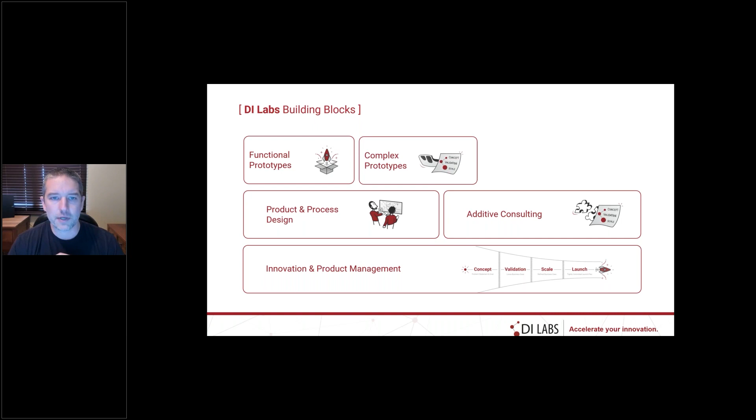In addition to that, we've got these things we call complex prototypes. We've got one in the presentation today, and it's something that can't be produced as a single part, or it's extremely complicated. We've got something neat to share today.

And then finally, we use those capabilities to run full production. We've got a couple of examples that we'll share today where we'll produce parts in the tens of thousands on our additive equipment, using our equipment in place of traditional manufacturing like injection molding, for example. So those are the building blocks for our business.

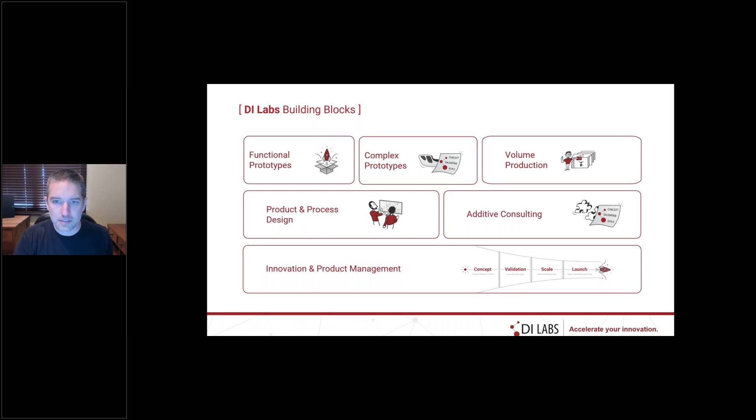I'll share a little bit about our history. Brian and I founded our company in 2013. We're geeks, we're gearheads, so we founded our company as a product development firm. The very first thing that we tackled was the redesign of print heads for fused filament fabrication machines.

One of the challenges that we faced was we needed to be able to do prototyping to serve our customers' needs, but we needed to do it significantly faster than the technology on the marketplace would allow us to. So we essentially developed a printhead system that was 2 to 4 times faster than anything else on the market. We did that for ourselves, for our in-house needs, and we found that the market also needed that technology.

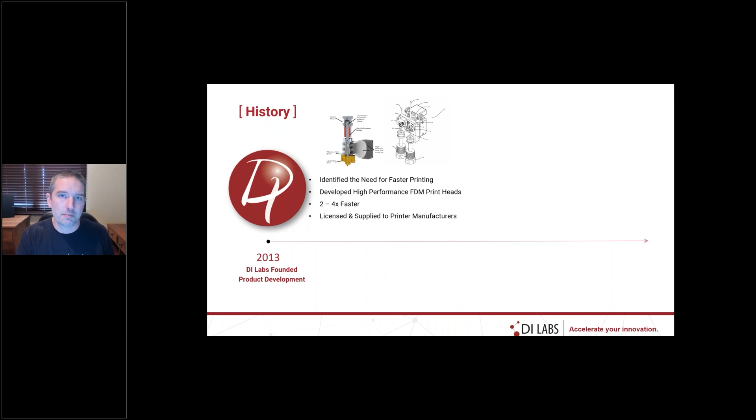So we ultimately licensed and supplied that hardware technology to printer manufacturers. I think that's pretty important for us to share, simply because we've been deep into the thick of it, and we recognize the need for speed—the need to get to market faster and capture the opportunities before your competitors do. Along with the development of that technology, we've also been developing products over the last several years.

And up until 2017, we were using the FDM technology that we had developed along with SLA to provide prototypes to our customers. We also did some outsourcing to other service bureaus, but what we realized was that either the quality wasn't there or the speed for us wasn't there.

So in 2017, we made our first major expansion with additive manufacturing, and we purchased an HP multi-jet fusion machine. We are proud to say that we were the first in the state of Minnesota to have this machine, and it was necessary for us to be able to provide quicker response time to our customers, as well as greater volume capacity. So we purchased that at the end of 2017.

And then about a year later, we doubled our capacity and brought on another 4,200. And since then, we've continued to expand our technologies and our technology portfolio to serve our customers' needs. Essentially the way it works is our customers will bring us a project. If we don't have the capabilities to serve the need for that project, then we'll make the investment in the technology to be able to do that.

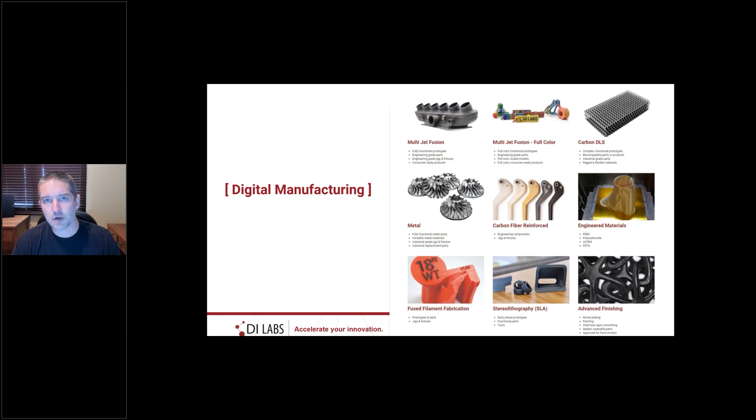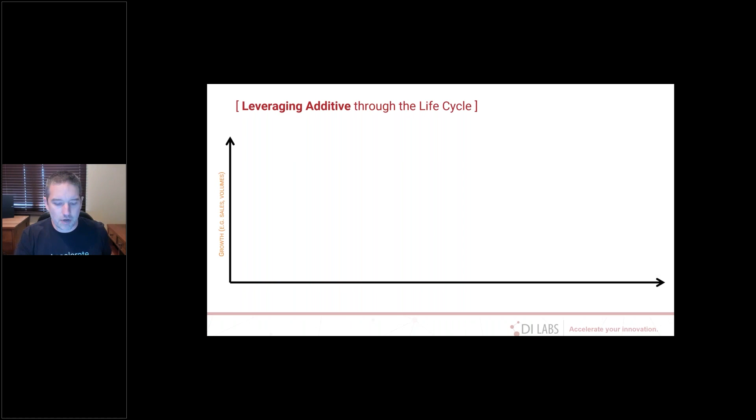So what does that mean, competitive advantage, and how do we use additive to provide that? The way that we think about it is in terms of the product life cycle. And I know that most of the folks on the webinar have been familiar with this type of graph. We added the development stage to this life cycle chart.

Essentially, we've got the development stage, introduction, where the product gets introduced to the market and you start to build sales growth. And then you've got sales growth ramp up, which leads into a mature product line. And then ultimately at some point, that product line will mature and it'll end up declining in terms of demand from the marketplace. Well, we use additive manufacturing in each of these stages today.

In terms of development, I think we're all familiar with using prototypes for development activities. It's been common for decades. We're also using additive manufacturing for the initial production. So thinking about in terms of offsetting risk and getting to the market sooner, we'll share some examples where we use our additive manufacturing equipment to bring on products to the market, get customer insights earlier and more often, so that we can sense what failures may exist before we go all in.

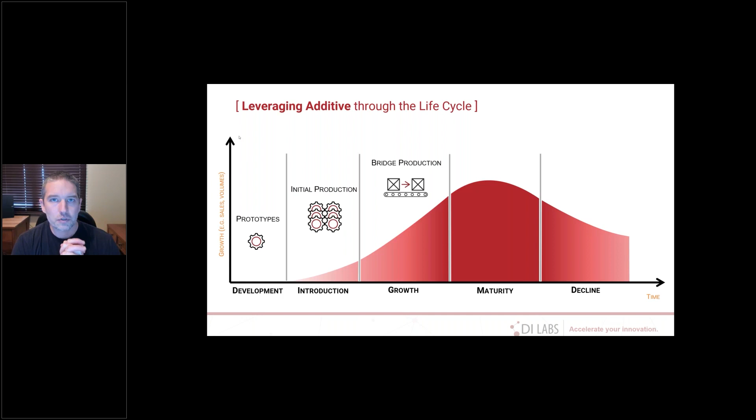Going through the growth phase, we'll use additive manufacturing in terms of a bridge solution. So where we start to get to that volume demand where additive manufacturing may not have the capacity, we'll use additive to get us to the place where we can use injection molding. So we'll consider that as a bridge production tool.

And then in the mature stages, we'll use additive in terms of jigs and fixtures. So it's really to help aid in the production of products using traditional technologies like injection molding or subtractive manufacturing.

And then finally, in the decline stage, we're using additive for on-demand repair supply. Rather than having extensive inventories of parts for products that are obsolete or out of date, we're using additive to basically serve as an on-demand supply chain. As parts break, we're able to respond quickly with production, which saves extensively in terms of cost of inventory.

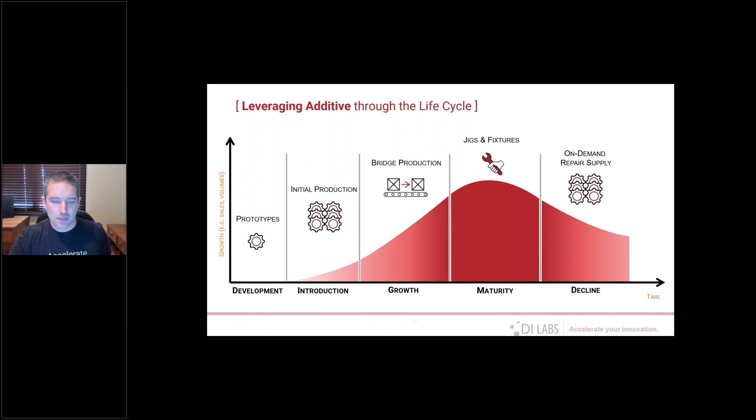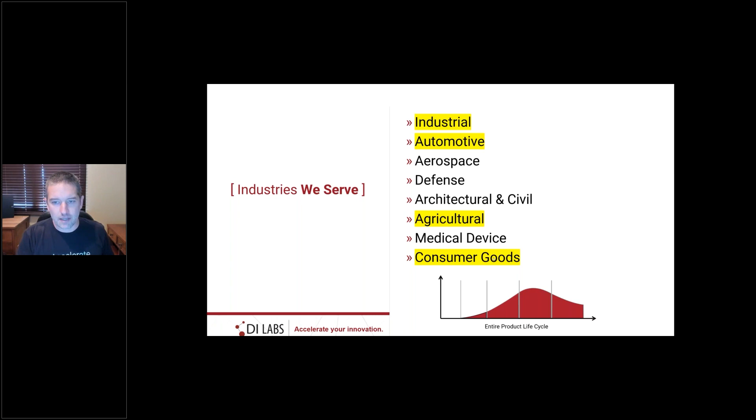Each of the examples we have today can be applied to all the segments shown on the screen, but primarily focused on these highlighted sessions. All of the examples will at one point or another encompass the entire product lifecycle from cradle to grave, and as we go through each product example, we'll highlight where they serve the life cycle.

So we're sharing case studies in a 2-step approach. First, I'll share the case study itself and showcase how we applied additive manufacturing to solve a problem. I'll share what the results were, and where in the life cycle that solution took place. Then we'll go behind the scenes and share how the product or solution was made, basically how we did what we did. We'll share some tricks, secrets, packing configurations, and special considerations we had to take in order to solve the problem.

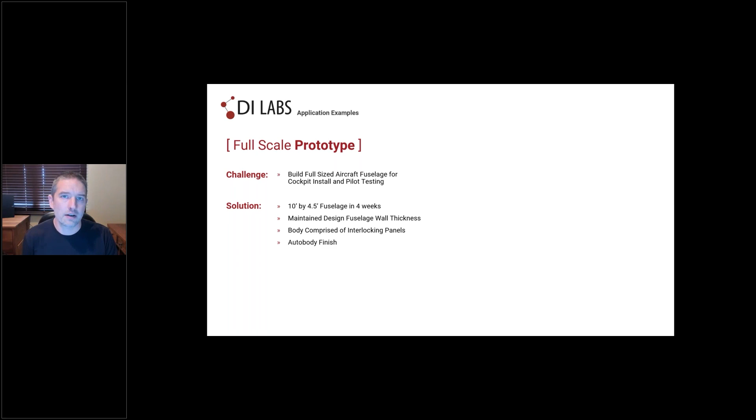The stage of the life cycle we supported with this project was the tail end of the development stage to validate the design. It's then been used to ramp up sales and provide visuals for potential customers, to allow them to see the aircraft before the mold and finished product was on the showroom floor. This is a great example of using a full-size prototype to basically develop pre-sales with potential customers.

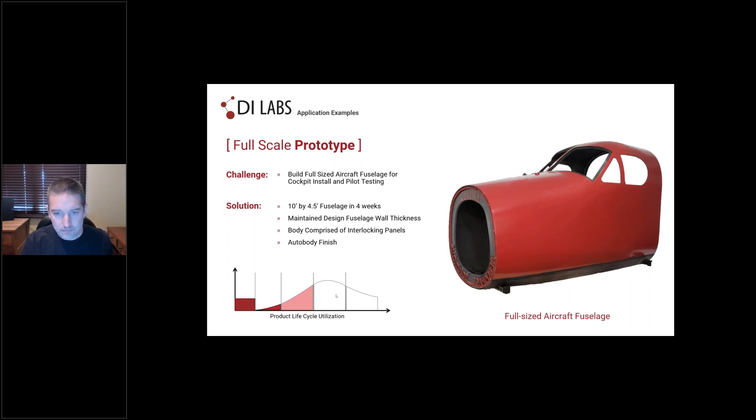So then the question is, how did we do it? That particular model was comprised of over 130 panels. That's pretty tricky because the panels are thin, and they all have to lock together - you can imagine it's like a three-dimensional jigsaw puzzle. So we had to design the panels to minimize or eliminate warping and dimensional change.

We designed the pack to optimize thermal management so we could produce the body panels fast and in volume without having distortion, and finally to be able to maintain the outer surface of the skin. This floating image on the screen shows one of the packs we had for the panels - there's maybe 10 or so panels in this pack, plus some other parts in this file that we ran along with this particular project.

The entire fuselage was produced with a nylon PA12. So this virtual pack here shows what would come out of the HP multi-jet fusion, and it would have come out in nylon 12.

Print time for a pack like this would have been probably about 14 to 16 hours. And because these panels are so thin, we cooled them over an extended period of time, something like 30 to 40 hours. So you can imagine, as we were producing this fuselage body, we had 130 some odd panels, 10 to 13 panels per build. It took us about 10 builds to produce. So that gives a snapshot of what that looked like from a process flow standpoint.

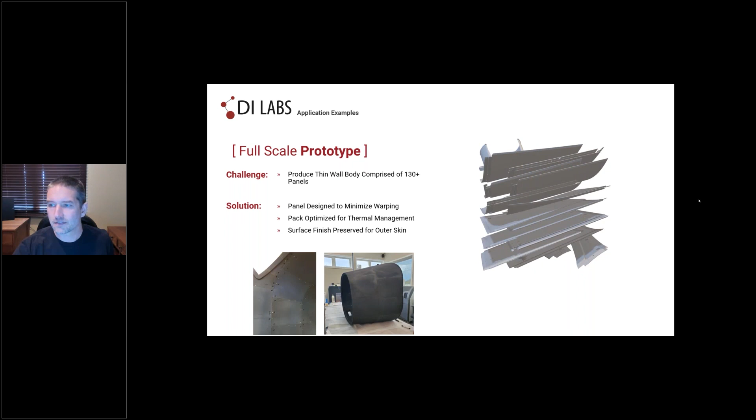Alright, so we'll move on to the next case study. We'll change gears here quite literally. This was a manufacturing process adapter that was used for a customer that had developed a new product. It was a plastic tubing product, and they were challenged because the new product was different enough from their current tubing that the downstream processing equipment they had wasn't compatible with the new product. So they brought us the challenge of adapting the existing equipment to the new product, and do so in a very short period of time.

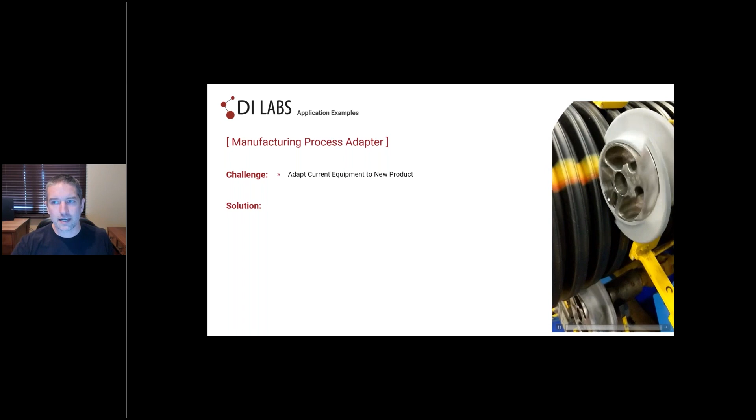As you can imagine, the product was being produced. They had this secondary process where they needed to modify that product and they needed to be able to get it out to customers, so time was of the essence. They brought us this challenge, and what we did was we essentially 3D printed adapter sleeves out of nylon PA12 and had them fit over an existing aluminum machined hub, essentially. So we adapted the existing technology for the new products.

By doing that, we saved about a six-figure capital expenditure, because they didn't need to make the new aluminum hubs. And on top of the expense savings, there was a time savings of over 12 weeks. The reason for that was the aluminum hubs took something like 12 to 16 weeks to machine, and that would have prevented the new product from going to market in its final form. So in about a week and a half's time, we were able to reverse engineer the hubs and then 3D print these nylon sleeves to fit over them.

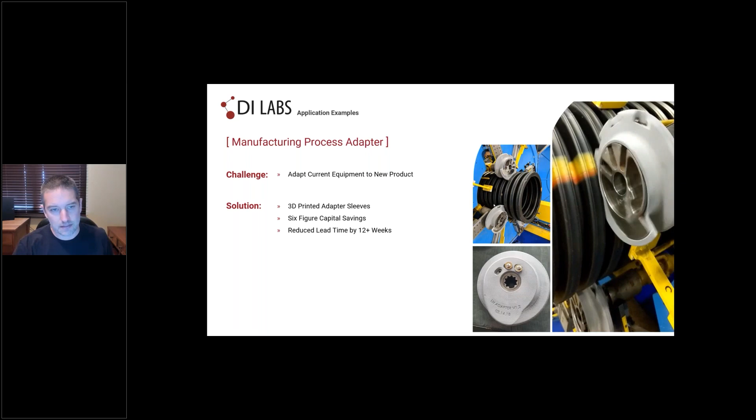This project satisfied nearly all stages of the product life cycle for this customer, from introduction to growth, and it has the ability to serve through the entire lifetime of the product in terms of manufacturing. In this case, the nylon sleeves may ultimately be phased out in lieu of aluminum hubs, but they do have the performance and strength to last the lifetime of the new product.

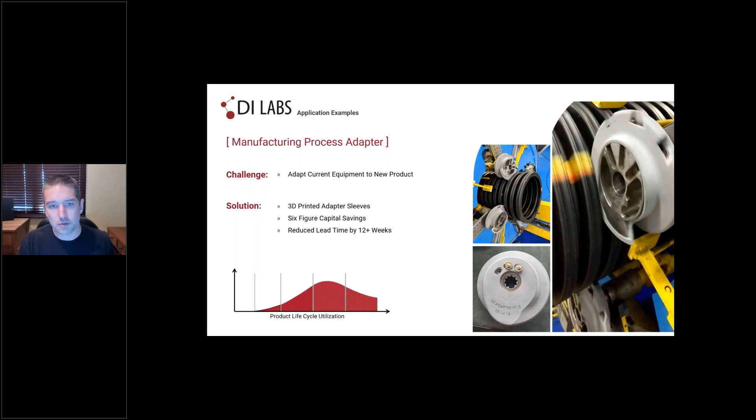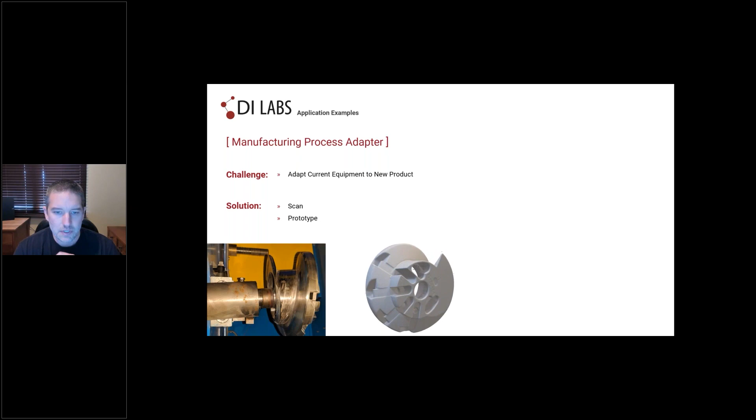Looking at this from a process and manufacturing standpoint for 3D printing, the process workflow for us was to scan the existing aluminum hubs. After that scan, we produced a prototype so that we could have something to fit the new sleeves to. And then we transitioned into production.

This rotating image here on the right shows 6 or 8 different sleeves that are in a virtual build. So for every one of the HP runs, we would have had about 8 sleeves that came out of a production. And this is how the parts would have been packed in the build.

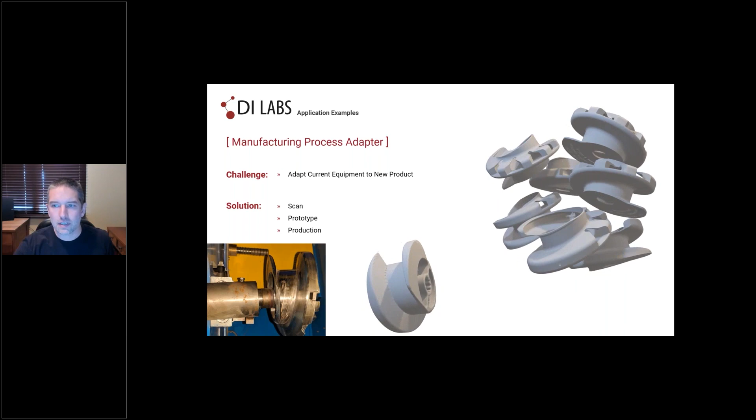I just want to make sure I'm getting the questions here.

We've got a question: how durable is this printed sleeve, and can it be used long-term on a production line? That's a really good question. We found that these sleeves, after they were operated for well over a year, showed a little bit of wear, but it was only in discoloration, not in thickness. So this particular solution is still in place today, and it's still serving this application. We found the sleeves to be quite robust, and because they're being complemented with the aluminum hubs, there is really little extreme force being placed on the sleeves. So it turns out to be a great solution where you can combine subtractive manufacturing along with additive to solve challenging problems, and do so much faster and at a much lower cost than using just traditional subtractive manufacturing.

All right, so we're going to transition now. We're going to change gears again.

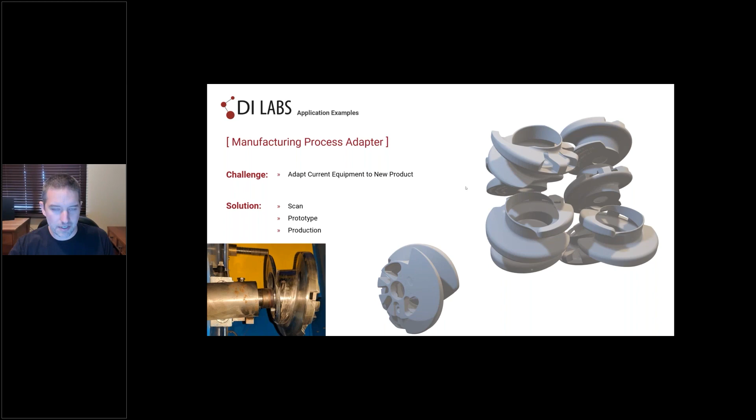Into an example of a project where there was a new market introduction. We had a customer come to us who wanted to launch a new watertight threaded valve body. It was part of a new piece of equipment, and they weren't sure how big the market would be for this particular valve body, so they were hesitant to invest in injection molding. They needed to assess the market, but that would require more than just 1 or 2 parts. So they asked us if we could help finalize the design for additive manufacturing and produce these parts in low volume. The kicker was, of course, they needed them fast.

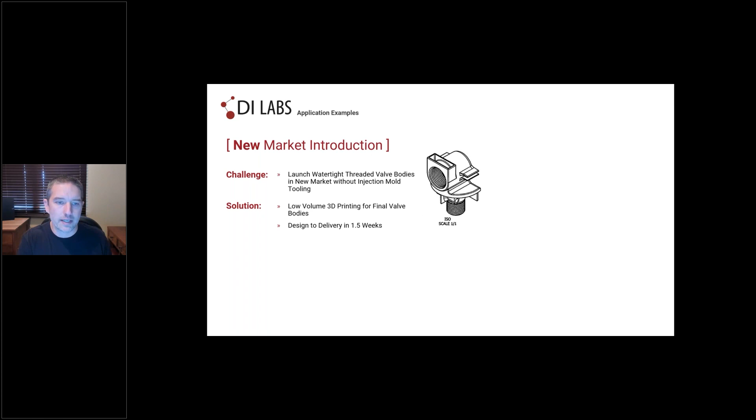They were at the place where they had the design nearly finalized, and the product this valve body would be attached to was going to market. So time was of the essence. We ended up taking this design, modifying it, and delivering it in about a week and a half, using it to satisfy the introduction and growth phase of their product life cycle.

The images here show the valve bodies, which we produced in nylon, the PA12, and they did have the threads built in. That was a requirement for the customer, that the threads would be built in just as they would be with the injection molded parts, and the threads needed to be watertight. This is something we tested and validated before going into production.

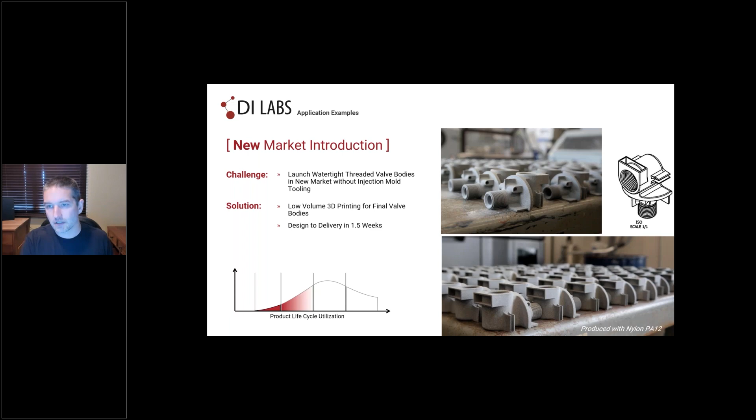So looking at this from a behind the scenes standpoint, how did we get away with producing these and having them be functional? It was really important to have threads that were functional and high performing. So we did testing before going into full production to make sure we could consistently produce those threads and have the dimensional accuracy necessary for water tightness.

Anytime we go through a project transitioning from a prototype stage to full production, it's critical for us to assess the build pack layout and make sure it doesn't have a negative impact on the print accuracy and consistency of parts from one part to the next.

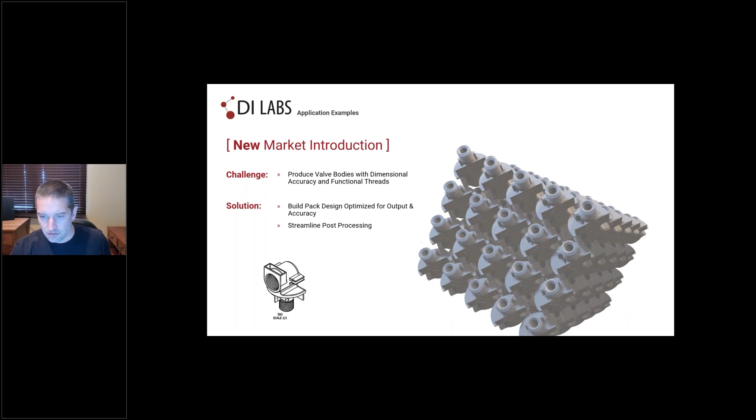We've got a question asking, were these parts designed for air or water, and does it seal? These parts were designed for water. They did seal. We had done some testing in-house. Most of the parts we did not chase the threads on—the threads came out of the machine, parts went through post-processing, and they were functional from that point on with the fittings the customer had as part of their injection molded assemblies.

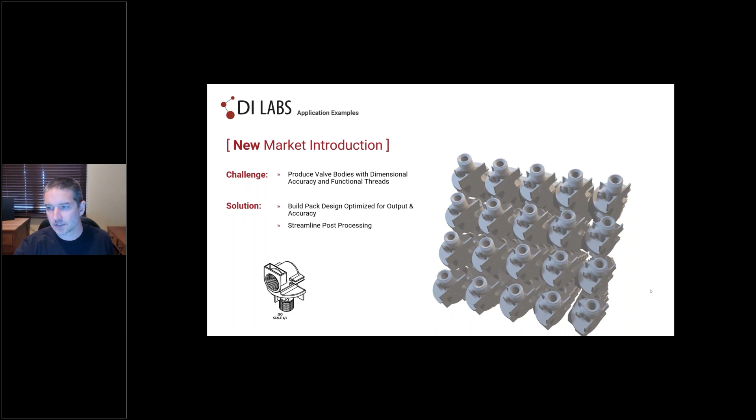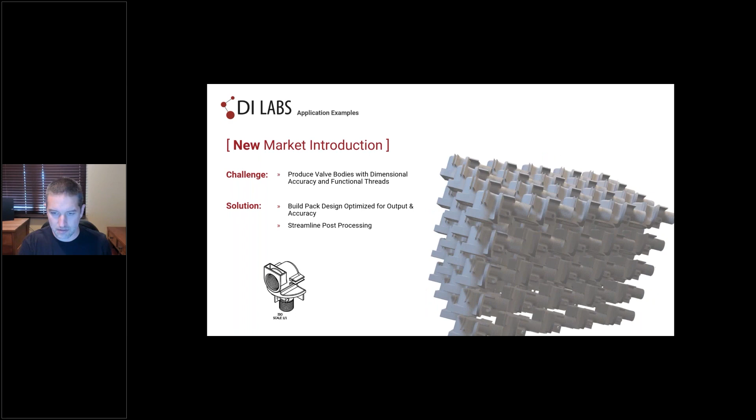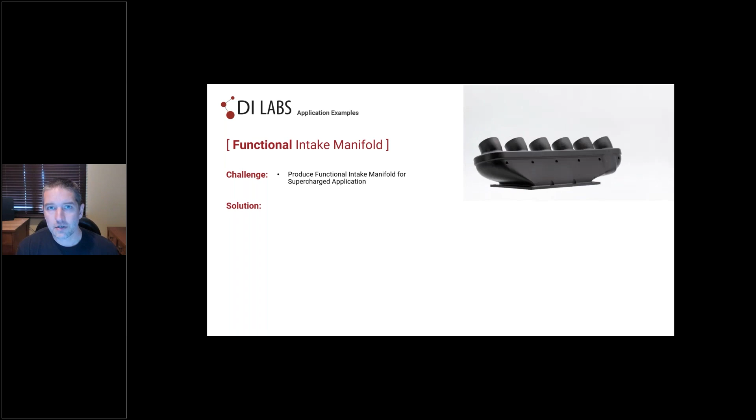Okay, switching gears yet again. This was an interesting project. This was a customer developing a high performance automotive solution. They were essentially applying a supercharger to an existing inline 6 motor that wasn't designed to be supercharged. They weren't quite sure what the market size would be for their system, and they needed to dyno tune their setup. So rather than going into a cast aluminum manifold, they came to us.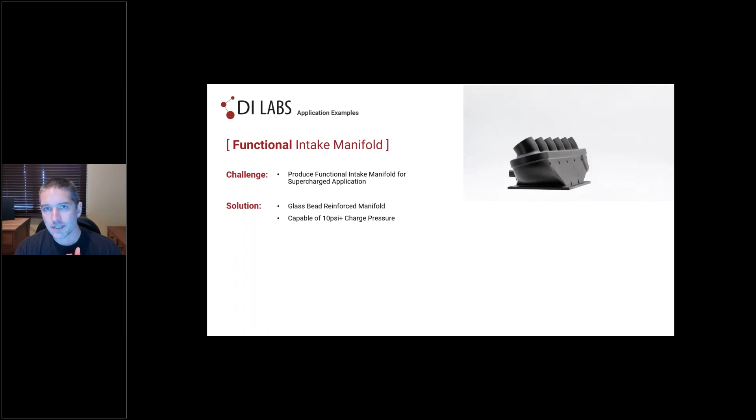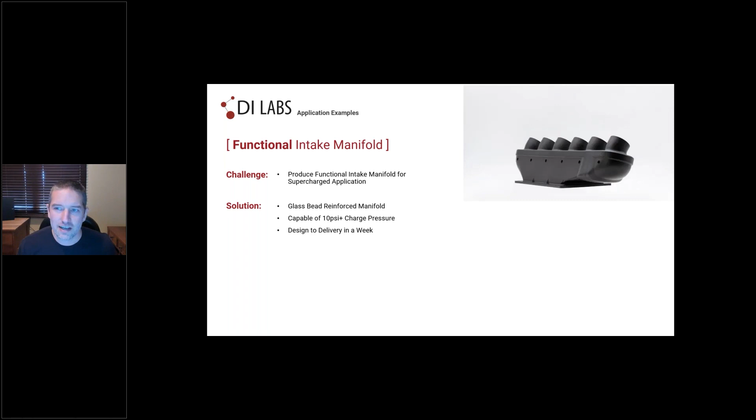We worked with them to essentially print their intake manifold. We printed it with glass bead reinforced nylon, and we worked with them to ensure the design was capable of withstanding over 10 psi of pressure for the temperatures it would be operating under. And again, the kicker, there's always a kicker—in this case, they needed to get the manifold on the car ASAP, basically as soon as possible. We were able to reconfigure this manifold for additive and deliver it to them within about a week.

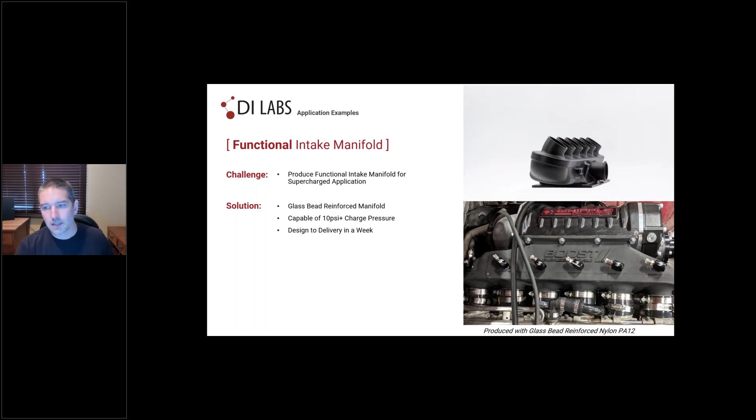So this bottom image shows a close-up view of the manifold installed on their setup and their engine.

It's kind of interesting because there's a couple of 3D printed parts on here. You can see that the manifold is black, it's got the fittings in it, and the supercharger that's mounted on it. On the back end of the supercharger, there's another elbow that's also printed out of nylon. So there were several parts of this system that were all printed out of the nylon.

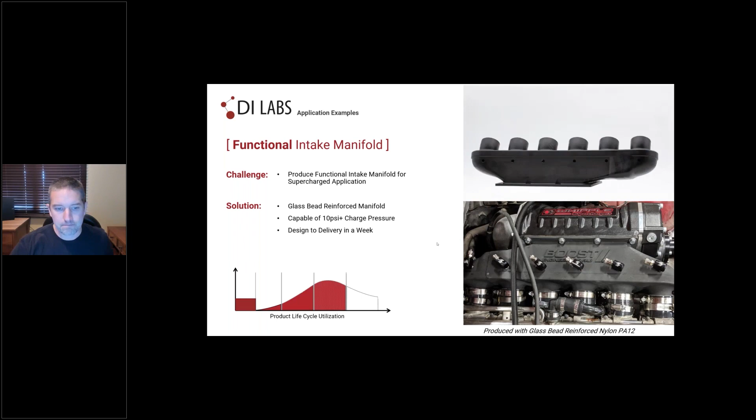This is an interesting project that is still ongoing. We used Additive to support them in the final phase of the development, along with the introduction and growth. We're working with them to understand whether or not this is feasible from an economic standpoint for full production. Depending on the volumes that they're producing, this may very well be a viable resource.

For those that have looked under their hood in the last 5 to 7 years or so, I'm sure you've seen that there's a whole lot more plastic parts that are used for critical components of the engine, essentially on the intake side. So the materials that we're running for this manifold are not unlike what's being used by a lot of the OEM manufacturers for their underhood systems.

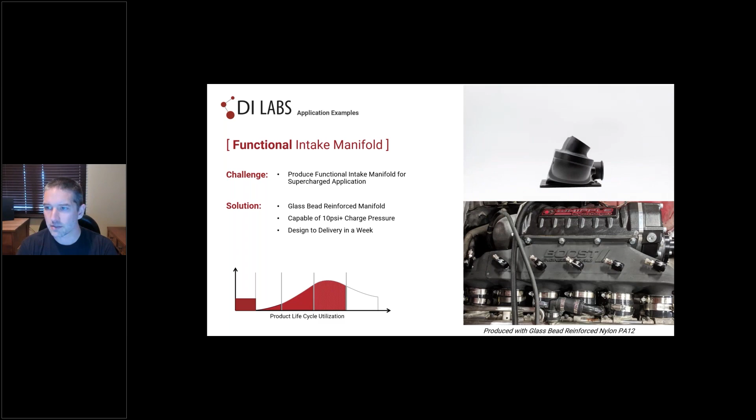So I just got a question. This is a good one. I'm glad you asked it. So the question is, are we able to thread plastic? And you'll see here...

Go back one slide. You'll see here on this image that there's a couple of brass fittings on the underside portion of this manifold. We had a couple of different options for the hardware connection. Either we could have threaded in the hardware, or we could have used brass inserts. In this case, we decided the brass inserts would be a better solution. So these two areas underneath the manifold are essentially brass inserts, which are used for the support structure for the manifold and supercharger. In a situation like this, the inserts are a much better solution than either printing the threads in the part or tapping them after the fact. This turns out to be a great solution where we essentially heat stake the brass inserts right into the manifold.

Hey Carl, I have a question that just came in as well. It's from Sam, and he's asking about the surface finish. Is it easy to control the surface finish on a plastic part?

Yeah, that's a great question. Sam, you may have picked up on the difference in the image on the top of the screen to the image that's on the bottom. The image that's on the bottom is a part that came out of our machine, and we essentially mechanically smoothed it. That's a form of tumbling. We did that because we wanted to be able to have the smoothest finish possible.

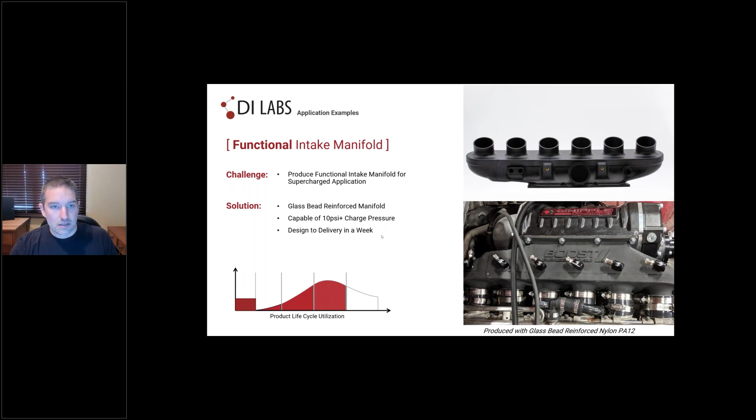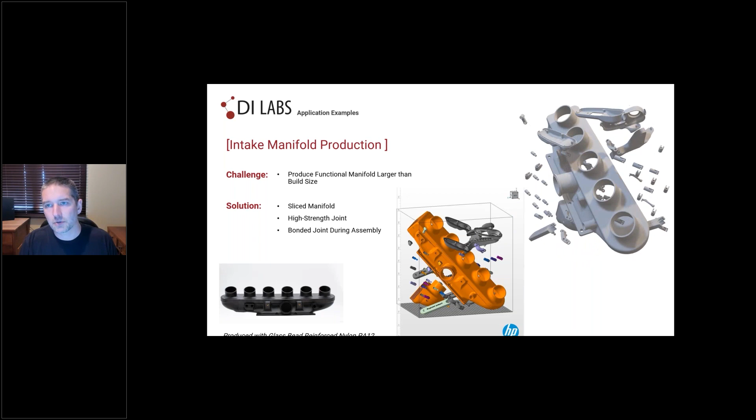And in this case, we did use an adhesive to connect the parts together. It was a two-fold connection, so the joint was designed so that it became positively engaged when assembled. And then in addition to that, we had pockets where we put in adhesive to ensure that the joint would remain permanently affixed. All right.

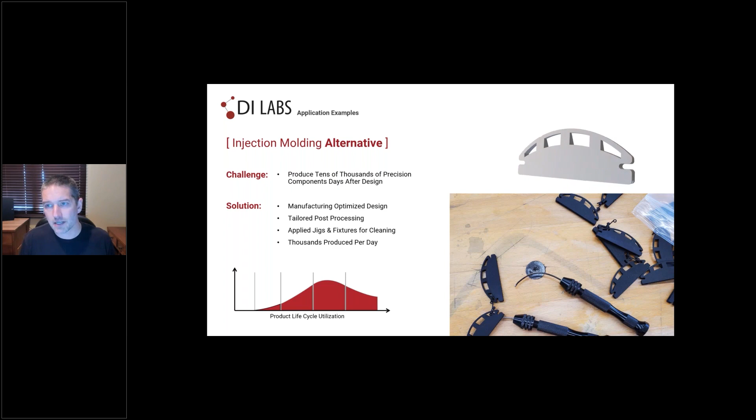For this particular customer, they had considered injection molding the parts. The challenge for them is that they had some unique features in terms of a channel that went through the part, and it was too challenging to injection mold. On top of it, they needed parts at the 11th hour - they needed to get parts out as quickly as possible so they didn't slow down their production operation. So this was a perfect example of where additive was able to deliver quickly and in the volume they needed of tens of thousands of parts within a short period of time.

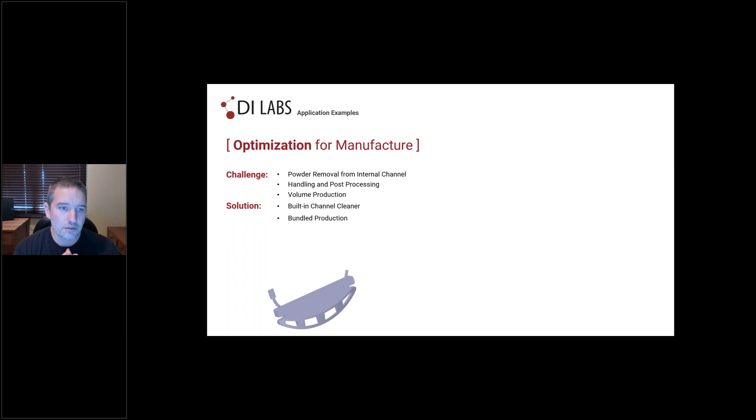Looking at this from a manufacturing standpoint, we did have some challenges. The biggest was the powder removal from the internal channel and the handling during post-processing, especially with such a great deal of volume. So it's kind of neat - we built in a channel cleaner, so you could picture this as like a built-in pipe cleaner that was designed right into the part and produced as part of the production. The other thing we did to help improve handling is we printed these in batches of 5, so when you pulled a batch out, you knew you had 5 parts, and it was easier to manage removal of the built-in pipe cleaner, as well as the post-processing and cleaning of the channels.

So this image that's rotating shows what part of the pack would have looked like. This was just one layer, and it shows just a small layer of what was produced within one of our machines.

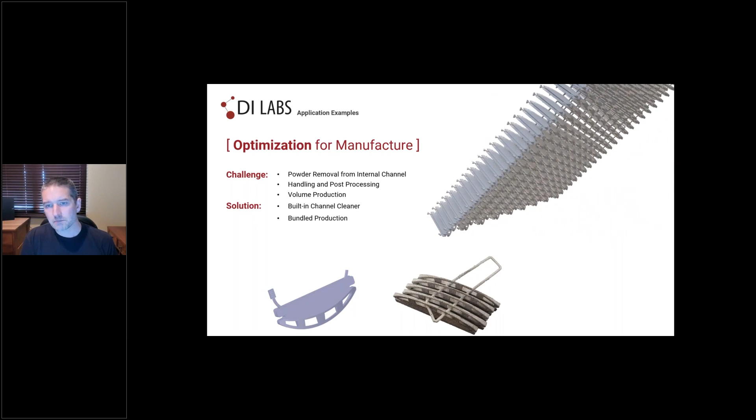Easier is an interesting question. There really isn't one that's necessarily harder than another. Because of the build volume of the machine - think about it like a foot cubed, a little bit larger than that, but think about a foot cubed - the larger the parts become in that build volume, the more costly they become. So we found that from a production standpoint, smaller parts tend to be - we're able to run them at higher volumes and be economically competitive. As the parts get larger, that can be a little bit more challenging from a cost structure standpoint. But it's really not harder or easier from a manufacturing standpoint.

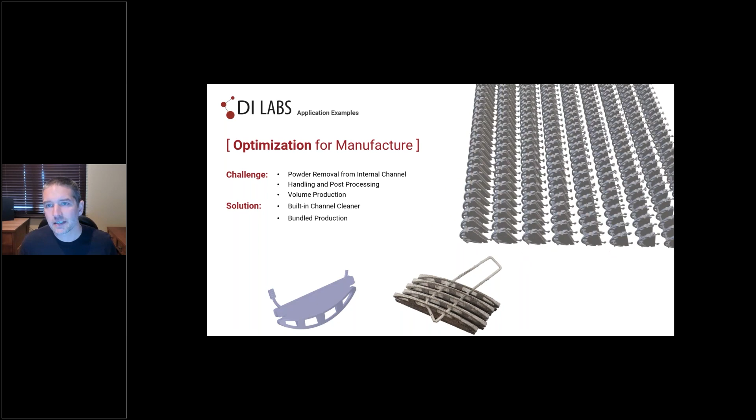So another great question: do you have any additive materials that can be used directly in the human body for medical applications? The short answer is yes. The long answer is that's a really nuanced and very specific area. I'd be definitely interested in talking more about that with you, Rob. The short answer is yes, we'd like to talk about that.

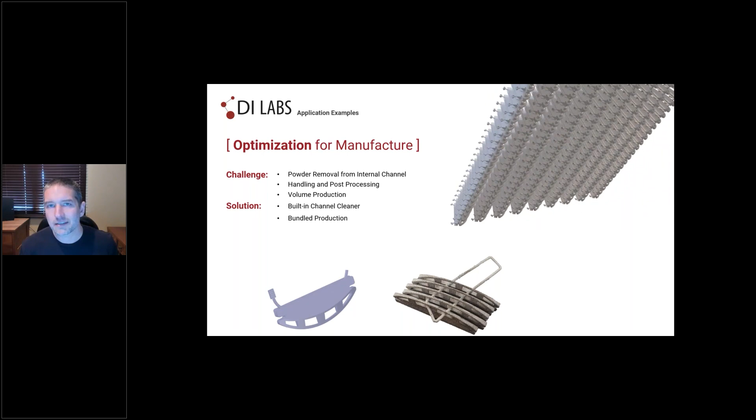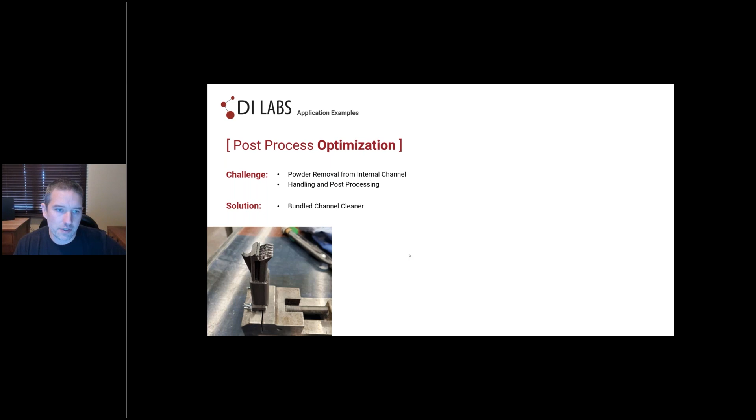We're going to stay on the same project on this slide. This was kind of an interesting process for us. So as we continue to produce those small parts, we found ourselves optimizing the process, and I wanted to share this with you all today. This little part here on the screen is a jig and fixture that we designed to clean the channels of those parts. This was printed on the Markforged, so it's a reinforced nylon 6, and it's an assembly that has some action to it. So I'll play a short video here.

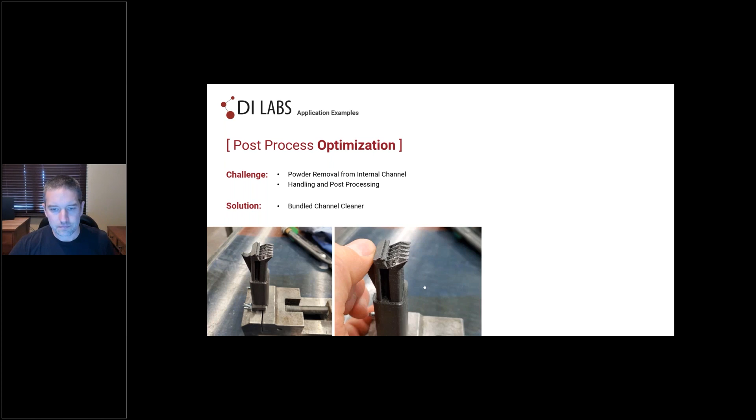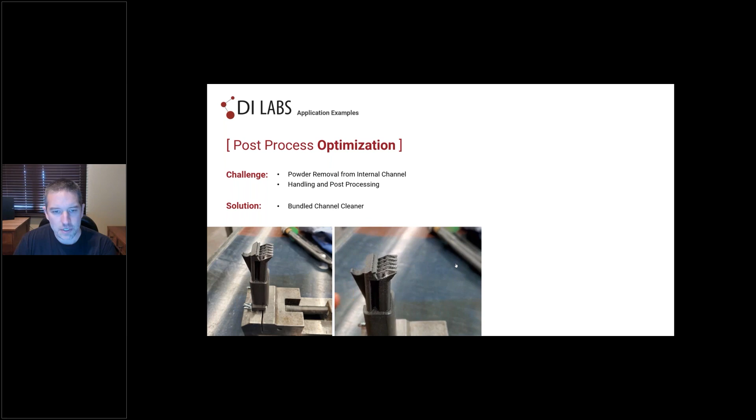So we designed that system so it had nested pipe cleaners in it, and when you press down the trigger, it would essentially insert those pipe cleaners into the channels of the part. I've got another video here that shows that system actually cleaning out a bunch of parts.

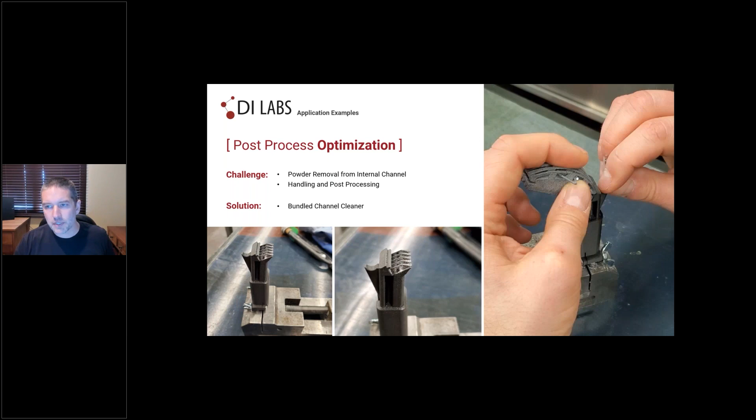This was a prototype fixture that we developed. There was a production version that was a little bit different than this design, but they were all 3D printed. It just goes to show how you can leverage additive manufacturing to be extremely responsive, to help either streamline a process when you get into production or reduce time. We found this to be extraordinarily valuable for that leg of the project, as we got to the 25% mark. This was something that we implemented.

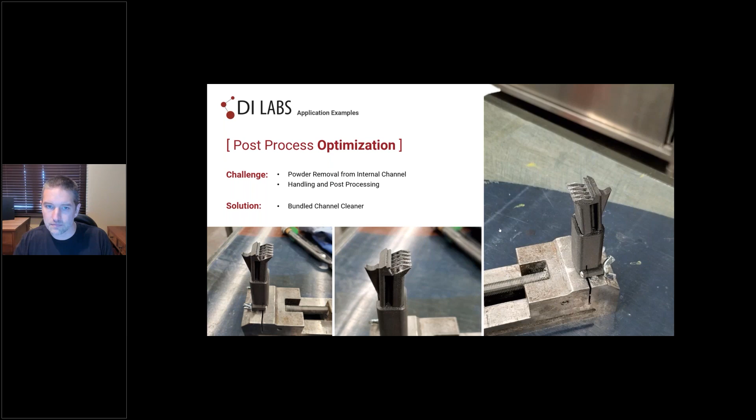And yes, we did hire a Seinfeld hand model for that, in case those were wondering. Beautiful hands, beautiful hands. I was just going to ask you that question, Carl.

Okay, moving along. This is another project that was pretty interesting. This was an aeroponics optimization and production project. A customer came to us that was doing aeroponics growth of produce, and they wanted to be able to go full organic. The baskets they were using for their lettuce didn't permit them to do that.

So we worked with them to develop baskets similar to what's shown on the screen here. We worked through a series of about 10 iterations involving about 16,000 baskets that we produced, to make sure we were able to manage the growth cycles, deliver the organic requirements our customer required, as well as optimizing the growth cycles. Through those efforts, we were able to provide over a 30% increase in produce yields, along with a reduction in growth time.

This is really remarkable. I realize there may not be a whole lot of agricultural folks on the call, but we did 10 design iterations of 16,000 baskets, and we did that over a period of 90 days or so. We were able to basically test at scale, and that was remarkable for us in order to optimize the product design and optimize the results.

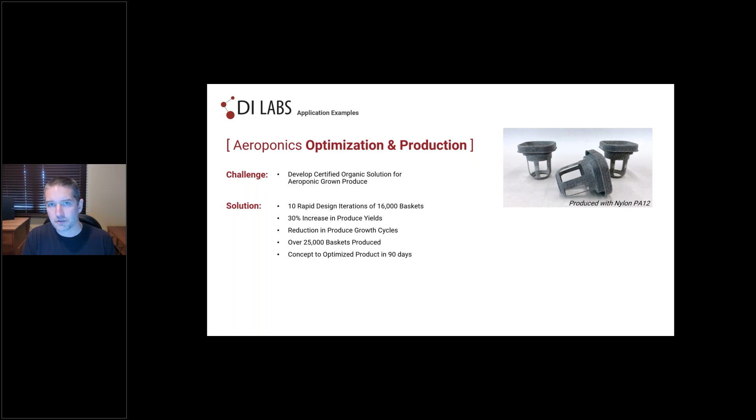We found results that we would have never expected. Had we been injection molding these parts on the second, third, or even fifth iteration, I don't think we would have been able to uncover the type of headroom we found in terms of positive results. So to date, we've done something like 25 or 30,000 baskets in production.

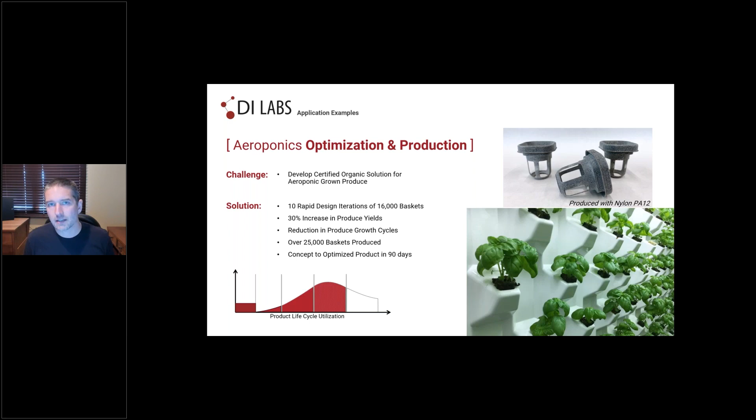Something that was a much higher profit for him. So we uncovered a whole new market opportunity that we would have never been able to uncover had we not leveraged additive manufacturing.

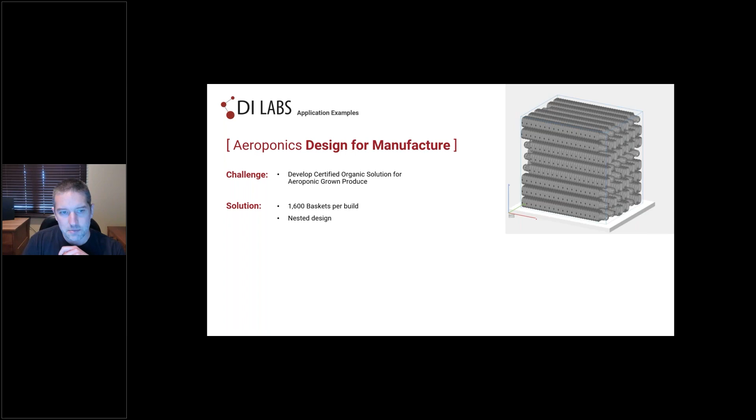From a production standpoint, we produced about 1,600 baskets per build. They were nested like solo cups. This shows a row of the baskets nested, and this is kind of a neat photo that shows the baskets in the print process, probably halfway through one of those rows as the parts were being printed. This was done in the multi-jet fusion machine using nylon 12.

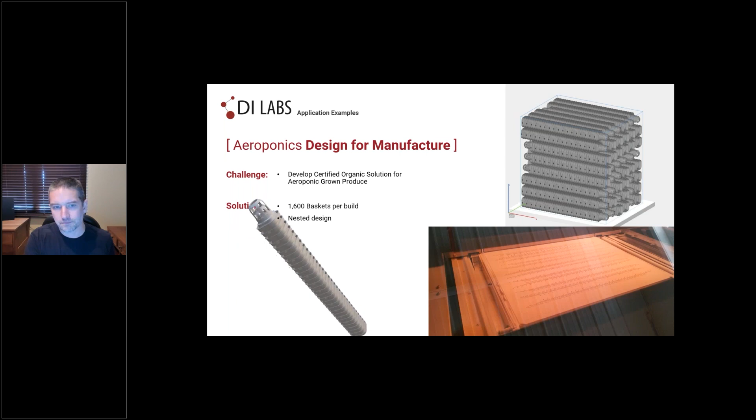As we were going through our post-processing exercise, we uncovered opportunities to build handling fixtures basically into the parts, so that when you pull a row or stack of parts out, they have built-in carrying fixtures to help simplify the post-processing.

Hey Carl, I have a question here from Paul asking about the time it takes to clean the parts. Is this time-consuming? It can be.

Every project is a little bit different. These are pretty extenuating circumstances because there are so many parts and they're caked with so much powder. When we take a project like this on in a production type phase, we'll actually develop the downstream process to semi-automate the cleaning of the parts. If you were to try and manage these parts with just a standard hand style bead blaster, it would take an extraordinary amount of time—longer to post-process than to print. So in these situations we develop the process to streamline that. We've gotten these types of projects down where the post-processing isn't that painful, but it can be if you don't have the infrastructure in place.

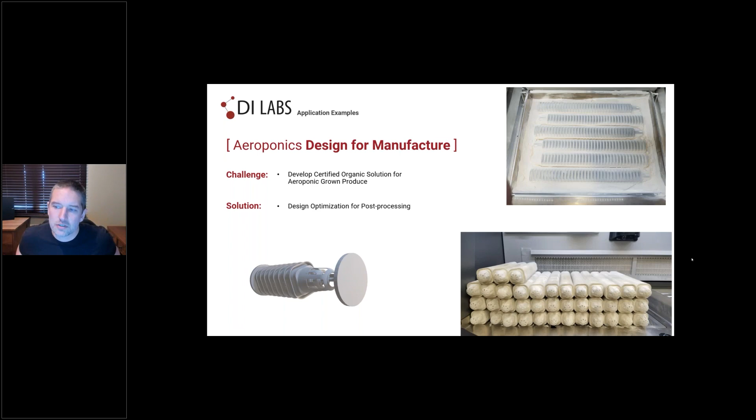A question just came in: are we helping with COVID? We are helping with COVID. Everybody on the call has probably been in tune with the news—additive manufacturing is a perfect technology to respond quickly to things like this. We've been developing tailored solutions, whether masks or shields, for particular industries and customers. We're able to go from design to production overnight. So the short answer is yes, and it's neat to see additive manufacturing coming to the call of duty.

Hey Carl, I have a question from Cameron about your post-processing capabilities—could they send jobs to you to control surface finish? Is that something you have capabilities to do in-house? Yes, we are. We will typically post-process parts that we produce. Sometimes we've got customers with great relationships who have their own equipment, and they'll send us parts to help them from a plating, finishing, or painting standpoint. So we do help some of our customers with that.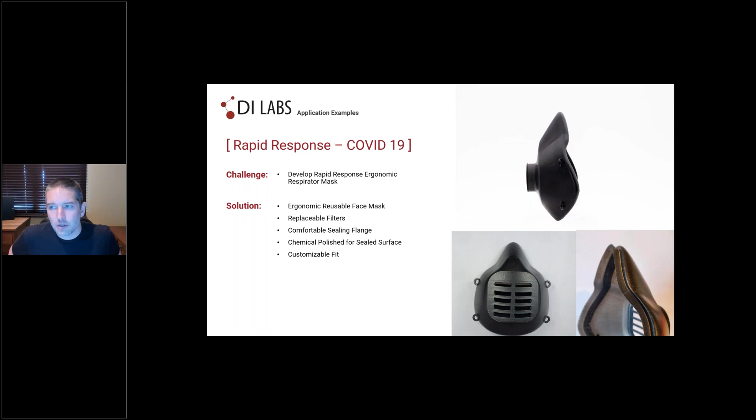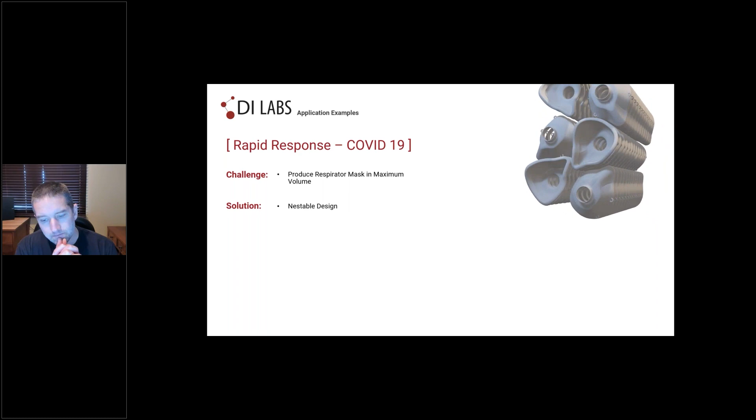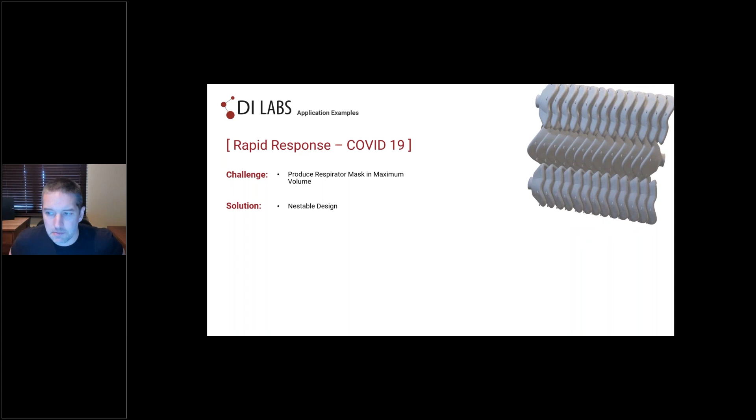There's another question about sterilization—how easy is it to sterilize HP material? Very easy. A lot of the parts we're producing today in response to COVID are being sterilized with radiation as well as the heat method—the name escapes me—but they're able to be sterilized with all of the most common sterilization methods.